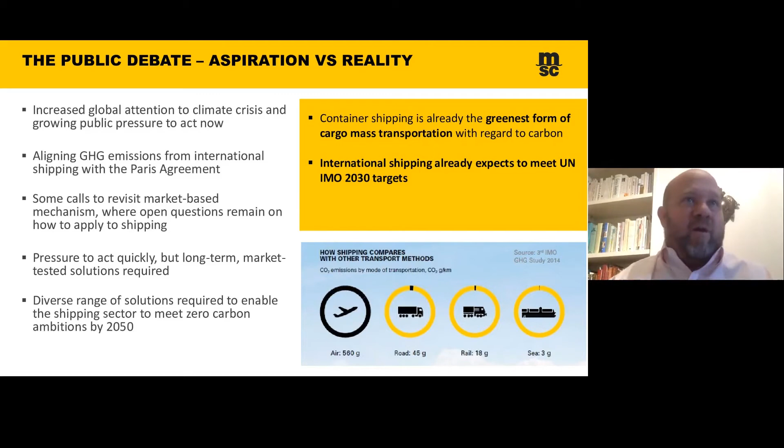We operate ships of different types in different ways, in different services. They have different lives associated with them in their service life. It's going to take a range of solutions. And I would urge everyone, have an open mind. And maybe it's something we haven't even thought of yet. And as ship owners, I think we have to break free of what our traditional notions are of what things have to be and move beyond that.

So I next want to talk briefly about what's going on with technology and innovation. I mentioned more R&D is needed. We've really got to bridge the knowledge and infrastructure gaps there. Shore power charging stations, let's face it, there's very limited availability. It's largely, especially for high power installations, a theoretical conversation, but it can make a difference in port, particularly with local emissions more than CO2.

One thing I'll point out is there are some nations that are really ambitious about installing shore power, but the source of the shore power is not a very CO2 friendly source. So what have you really gained? A gram of CO2 that's emitted in Durban might as well have been emitted in Reykjavik. It has the same effect on the atmosphere. So I think we have to keep that in mind and be practical.

And then batteries, hydrogen, renewable energy, that all plays a potential role. And then I think you also have to look at both retrofitting and design going forward. All the alternatives have limitations. I could do a whole hour, if you'd like, to give my thoughts for what it's worth on these alternative options. But you've really got to think about energy density, both with regard to weight and maybe more importantly with volume, because ships stop making sense at some point if too much of the interior volume is taken up for the fuels. And then you've got safety considerations too.

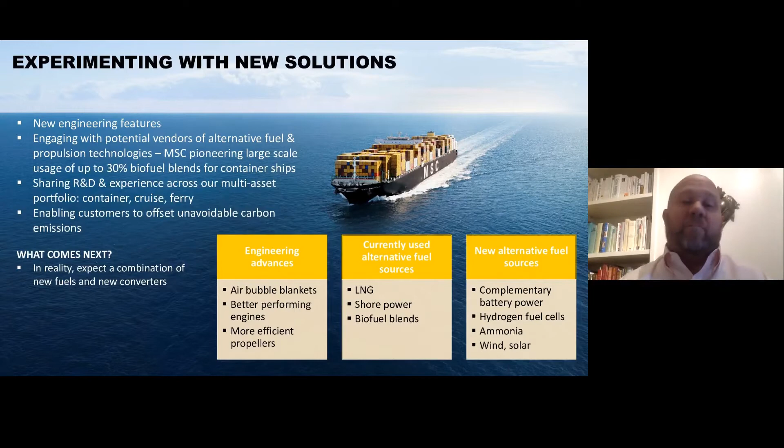And then other things to look at: battery power on large ships. Anytime in the near future, I just see that as being a complementary augmentation type of source, but it still definitely has a role to play, particularly if you've got diesel electric drive, and maybe you can keep that other engine, whether it's a generator or whether it's a main, from starting. You just don't ever have to start it, because you can control the surge with batteries. Has a lot of potential. Fuel cells have potential. I mentioned ammonia, wind, and solar as well in certain applications.

So then the last point that I'll make is just about the container sector. We are an absolutely essential part of trade, but investment in innovation is absolutely needed to bridge the technology gap. And I think both tracks, in regard to fuel and then the primary converters, the engines, if you will, but it doesn't necessarily have to be an engine. We should all be thinking out of the box and really do what's needed to live into the ambition that both we have and also society has for us. Again, I'll reemphasize, there is no one-size-fits-all solution here that I can see, and frankly, I think it is just a mistake to look for one or advocate for just one.

For example, a lot of people tend to criticize LNG. We don't. We see it as valuable today to take the emission gains that are available today, and they are net gains according to the research that I have confidence in, but it doesn't get us to the 2050 needs. But why not take those gains now and then develop biomethane or synthetic LNGs to make that a long-term, broader solution that really works in the end and gets us to the end state.

And right now, we all really need to do a better job as ship owners and our entire community explaining what we're doing. We're doing very good work, and we're actually pushing for regulations. We have repeatedly tried to enhance how we operate and how we're regulated in our space and to do our part. And I think the shipping community has historically just not done a very good job of that, unfortunately. I think we can all do better, and I would urge you all to be part of that.

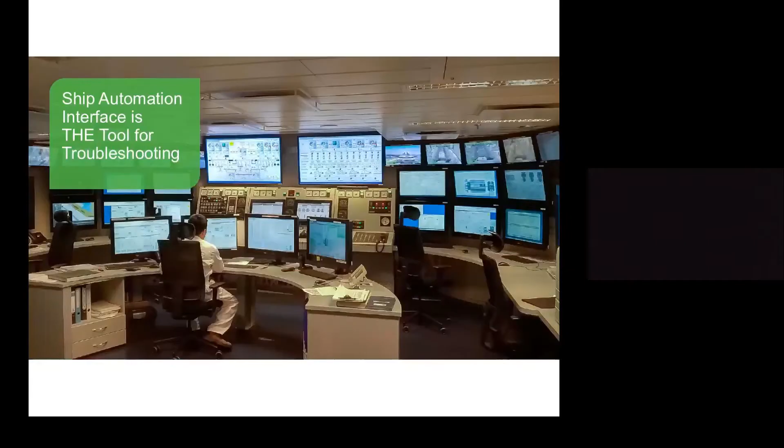The main reason why we are kind of key in helping the ships is obviously the ECR. The ship automation is the main interface for the ship crew for everything that happens on board the ship, and it all comes together in the ECR. All the alarms from various subsystems, all the operations are done from there, and all the historical data is stored in the ECR, and when the ship has a problem, that's where the problems are typically solved, and that's kind of our main center of information.

Large cruise ships have a lot of displays, a lot of information, of course, in the ECR. But this is kind of a typical setup in a modern cruise ship. Why is Valmet talking about this issue?

We've been providing these ship automation systems since the early 80s, 79, 82, and most of the systems on board, the bit older systems, they are all ours. There was a time period when the systems were delivered by our partner at that time, Valmarine. Mostly the cruise customers will know that name.

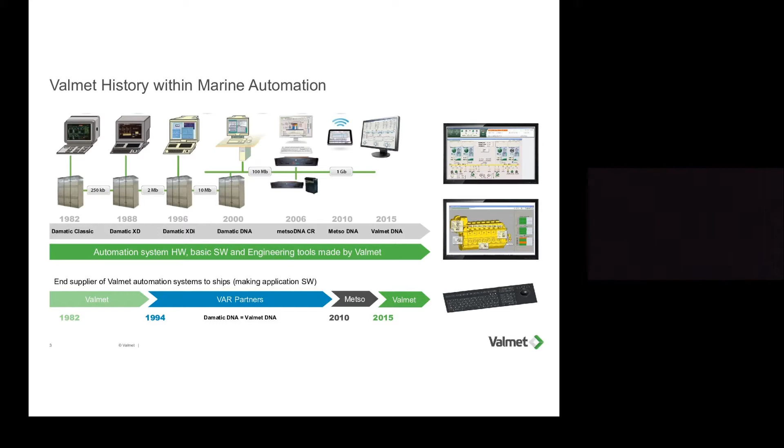About the remote operations and capabilities, we have 8 global service centers that are working completely remotely together with our customers in 4 continents. So basically meaning we have a manned service center in all time regions, and hundreds of connections to our customers' systems and hundreds of service cases throughout those remote connections. That's kind of the background why we are talking about remote connection. Especially it's been utmost useful during these corona times.

In North America, where I am, we've been able to support not only our cruise fleet, but also the so important tissue machine industry making toilet paper throughout our remote connections, while basically all the customers have banned entry of service personnel into the sites.

Also, we've been able now to do full system startups so that there is a minimized team on the site, and expertise support is done by remote connections. These all to limit the traveling needs to the sites and the amount of people possibly having connection with any other people.

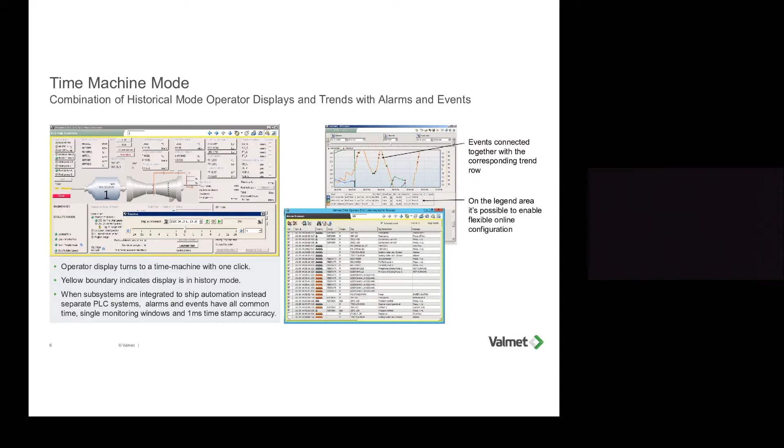Well, it's all great when the internet connection is in place and we can get the remote connection, but unfortunately that's not always the case. Often in the cruise industry, connections are poor and non-functional. So we need to have alternative plans and plan Bs in place. So this replay function that I showed previously becomes extremely valuable when you need to go to plan B.

So what the team can do is they can actually pick up their phone, do the replay function on the screen, video it, and then send it by phone connection. This is something that we have been using in several cases where the actual remote connection to the ship has not been working for one reason or another. And that allows the ship personnel to deliver the vital information to their superintendents and to us.

It's also at these times very difficult for superintendents to go on board the ship as well. So it's vital that the ship can somehow deliver the information to the shore, as the ships keep on having problems even if they are not sailing.

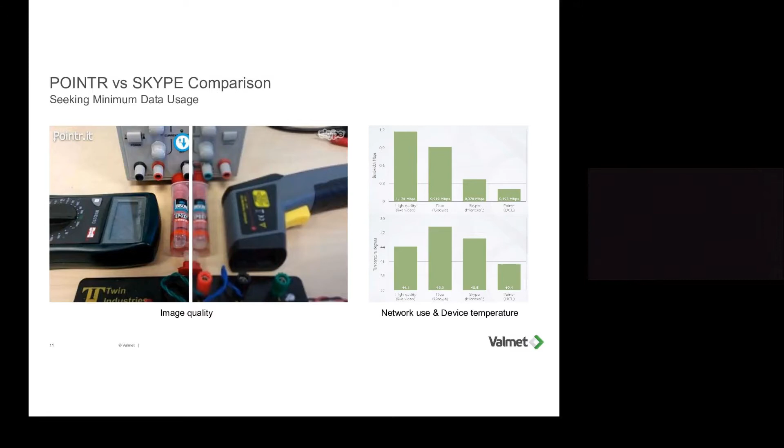When we are talking about remote access and remote support, we also, of course, need to think about the security, and this is something we can't avoid. A few tips there. Of course, nowadays all the companies are well educated on cybersecurity items, but I want to pinpoint that, first of all, there are very good guidelines: in the US the NERC CIP guideline for power plants and public utilities, and DNV GL and Lloyd's have their guidelines. We've been following all of those for years.

Also, when DNV started testing of the ships, we were the first ones on board doing the testing, testing our systems against their guidelines and making them stronger in case we needed to do adjustments.

And then a painful and difficult thing in the current economic conditions for cruise companies is that the Windows systems should be really updated. Windows 10 is the recommended system as well. The patching should keep on being done. With a lot of the systems, there is easily a temptation to hold off on the patching in the current conditions.

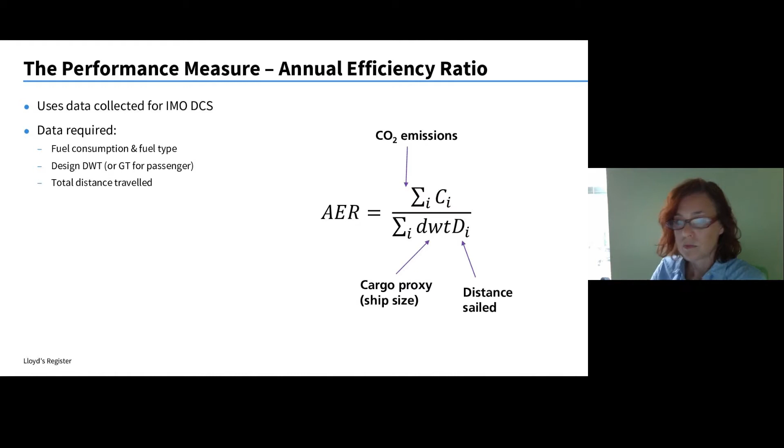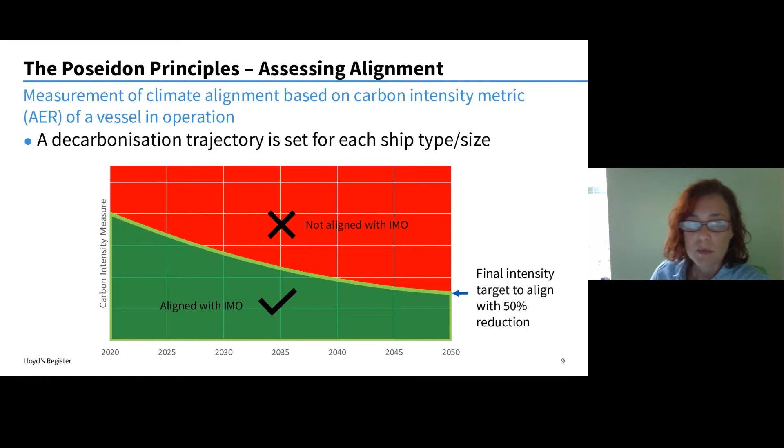And graphically, when it's calculated, it's reviewed and shows up in green. If it's not aligned and the calculation is above that trajectory, it shows in red, for ease of recognizing what ships in your portfolio are not aligned. This makes things relatively simple.

The vessel carbon intensity can be calculated using data provided by the ship owner as collected by the IMO DCS. This data has been independently checked to ensure compliance in accordance with these regulations, but requires the ship owner to provide consent for the data to be submitted to the relevant flag state and be shared with the signatory. The Poseidon Principles require that all signatories use this method for calculating carbon intensity so that it is, again, consistent.

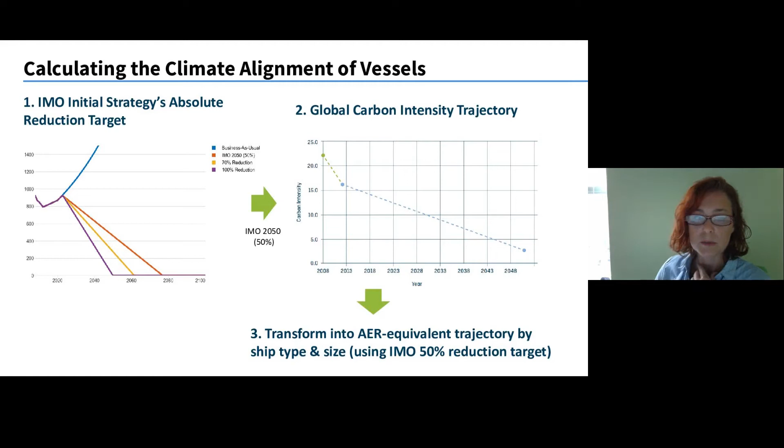To assess climate alignment for a single vessel, the vessel's annual carbon intensity is compared with the decarbonization trajectory for its respective ship type and ship class. And early on, you can see that it is much easier to use energy efficiencies as a method to drop your trajectory. And this is how the ships are represented, or the company sees the overall climate alignment of its shipping portfolio.

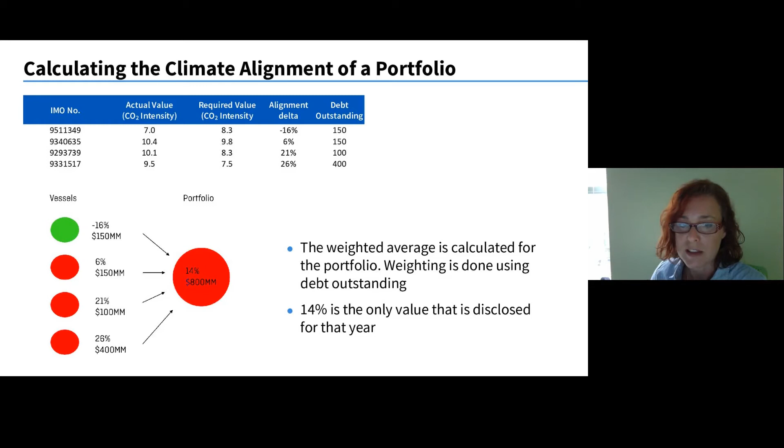So how do we meet the transparency requirements? On an annual basis, each signatory reports the overall climate alignment of its shipping portfolio and provides supporting information as per the accountability requirements to the Secretariat. This requirement takes effect for each signatory in the calendar year after the calendar year in which that member became a signatory, no later than November 30th.

This is done on an annual basis, and it is published for the overall climate alignment of its shipping portfolio, and also in any relevant institutional reports on the timeline that is appropriate for that signatory.

The accountability and enforcement principles are intended to ensure that the assessment and disclosure of portfolio climate alignment under the Poseidon Principles is practical, fair, and accurate. The intent of this approach is to ensure the development of trust in the Poseidon Principles amongst the signatories.

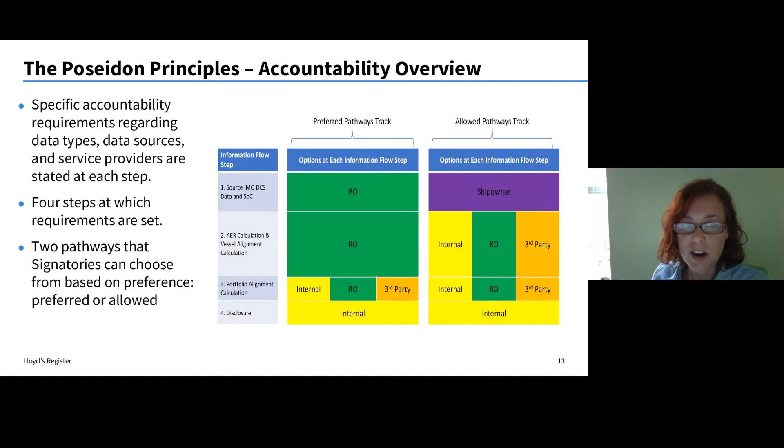At each step of the assessment of climate alignment, signatories rely exclusively on the data types, data sources, and service providers identified in the technical guidance. All these details are outlined in the guidance documents that can be found online.

So, the Poseidon Principles allow you to balance and manage risk in your portfolio. It's a potential instrument in carbon trading and offers significant benefits to signatories, to the global maritime industry, and to society as a whole.

What kind of climate alignment services are available? Using AIS, IHS Fleet Database, and LR ship performance models, we can determine the climate alignment, and this method has been proven to be plus or minus 5% accurate.

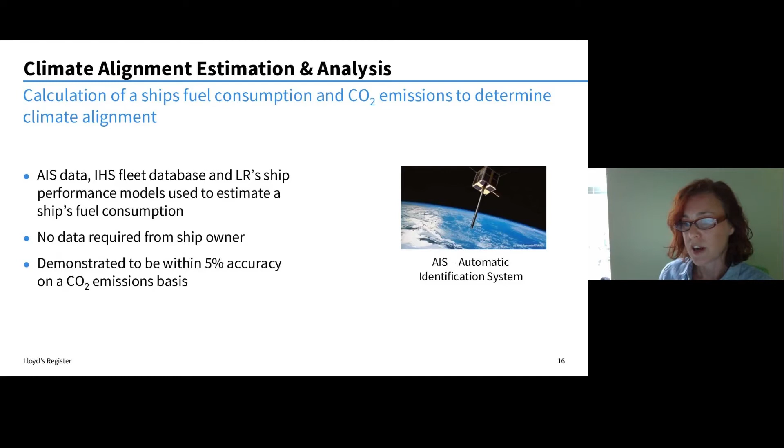By comparing more data, you of course increase accuracy, and the starting point is IMO DCS data that can be provided transparently for vessels that are classed with your RO, or that can be provided directly in the form of regulatory documents and certificates on board.

This is an example of climate alignment estimation and analysis, and it reports the annual efficiency ratio. And it shows what would happen if no further action was taken in the future, using the Poseidon Principles, all 4 principles.

So what kind of things need to be considered before becoming a member of the Poseidon Principles? Careful feasibility studies, risk reviews, and modeling are recommended to analyze voyage routes, operating ranges, missions, and ensuring that there's a consistent, reliable supply chain, that the infrastructure has been developed, since there are varying levels of confidence in some of the low to no carbon technologies.

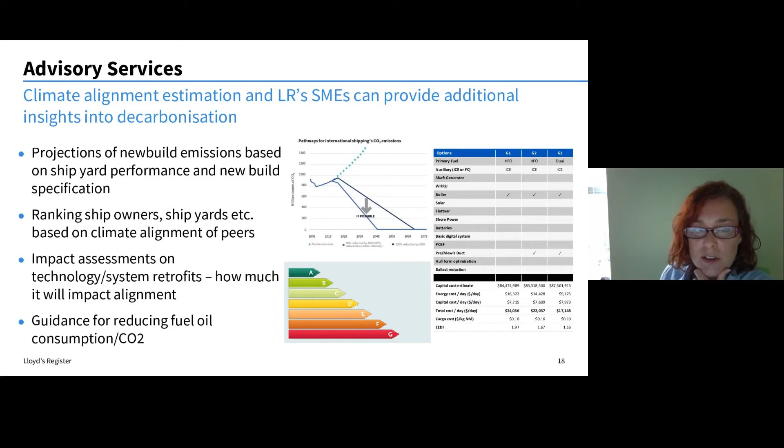And collectively, collaborations are of benefit because the infrastructure can be partnered with government agencies and also with ports that are interested in being part of this transition. There are many that are already investing in renewable energies. And so it's really important to understand where those actions are taking place, and what portion of your fleet might benefit from that.

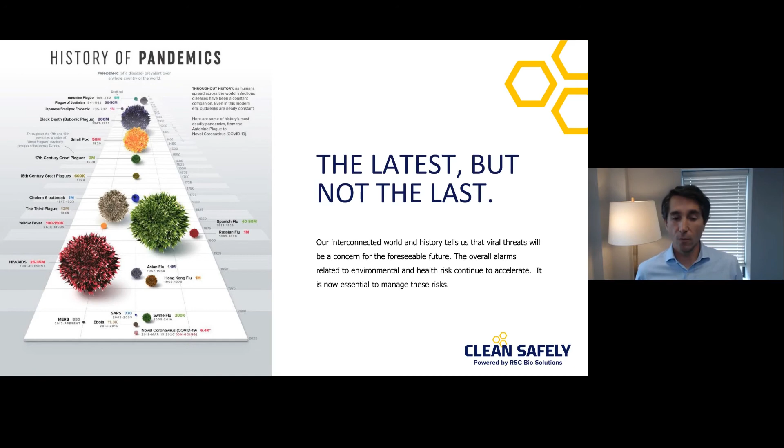If you study this chart closely, you'll see that pandemics initially were coming every few hundred years, and then you would see one every 100 years. Then there was one every 50 years. In the last 20 years, there have been 5 pandemics. So in the marine timeline, a vessel on a 5-year dry docking cycle should expect to deal with a pandemic within that cycle, which is really hard to imagine when you consider the issues that we're all facing trying to deal with the current crisis.

And like many of these threats, whether it be the environmental risk that we talked about earlier or this pandemic threat, it's our responsibility as leaders in the industry to address the concerns about health and safety. And true to our strategy, we want to do that in a way that doesn't compromise the business, the economic goals of the company, and the challenges the industry is facing to create value. We want to balance both, and that's why we are excited to be talking about some new solutions today that we think will do that.

We have been, as I said, in this space for a long time, really built around this initial lubricant technology, and we saw the opportunity to take our experience in both cleaners and lubricants and essentially create a platform. We had been hearing a lot of questions and challenges about how do they do this? How do they make the environment, whether it be the office environment or the vessel environment, safe? And so we feel like this is an opportunity for us to create some value.

And it's not just a reaction to the current times. We believe this is going to be a significant and important platform for us in years to come. And a lot of it is based on the same thing that we have been doing with customers for many years, which is helping deal with the confusion and the uncertainty around how do I keep my business running, address this risk, but do it safely, do it efficiently.

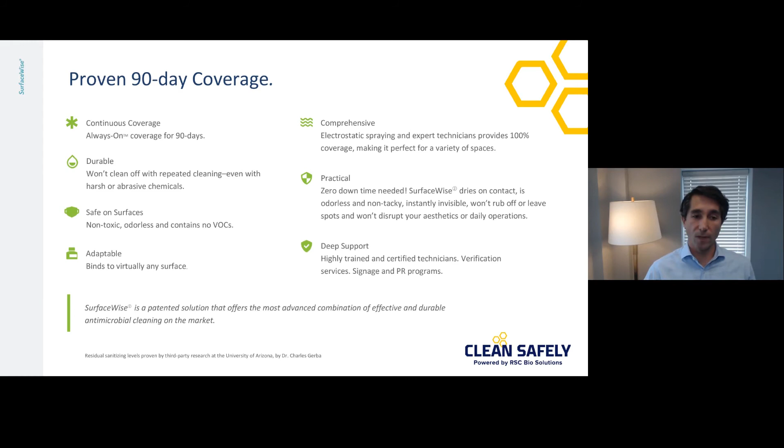We have a significant amount of research behind this on 2 generations of this technology. The initial technology that has a long track record has a lot of data in hospitals, in transit authorities, in a variety of applications that show durability. And what's important is the evolution of the technology has improved the binder so that it is not only more durable, but now the effectiveness against the coronavirus is now evident.

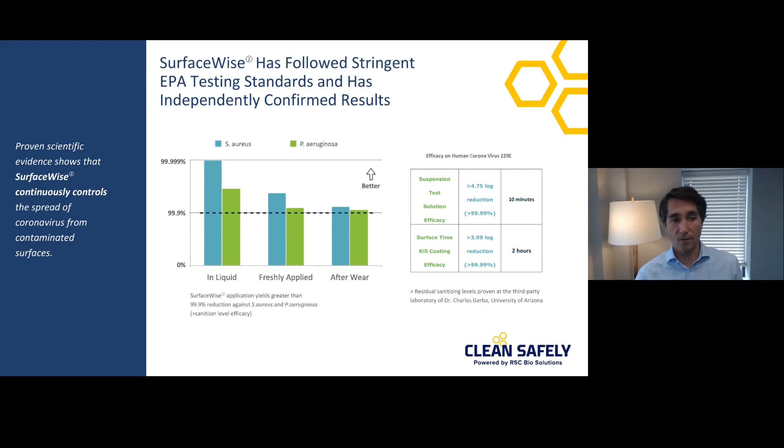And there are a number of research studies, again, to support this, including research behind the coronavirus itself. And I think what is really important to understand when you think about a technology that can deliver essentially an always-on protection is it does two very significant things for the vessel owner operator. The first is it can dramatically change what the practices around daily disinfecting could look like.

So in many cases, our customers are doing nightly disinfecting, daily disinfecting, which provides a point-in-time solution, but then as soon as contaminants enter the environment, there is no solution until the next daily disinfecting. Our view is some of that disinfecting is going to continue to happen with this technology, but the amount needed to maintain a healthy environment is dramatically different.

The second thing is the overall bioburden, that the amount of biofilm that accumulates on surfaces is dramatically reduced. And this is what most of the studies that have been conducted are designed to do, is to look at the accumulation of the bioburden and the level of reduction that takes place with this type of coating.

So imagine in an environment like a cruise ship, if you're able to reduce surface contaminants by more than 75%, and the potential for infections and cross-contamination significantly, what that does for a vessel owner operator, a cruise ship, could be really significant in terms of risk reduction, regardless of the savings on the daily disinfectant side.

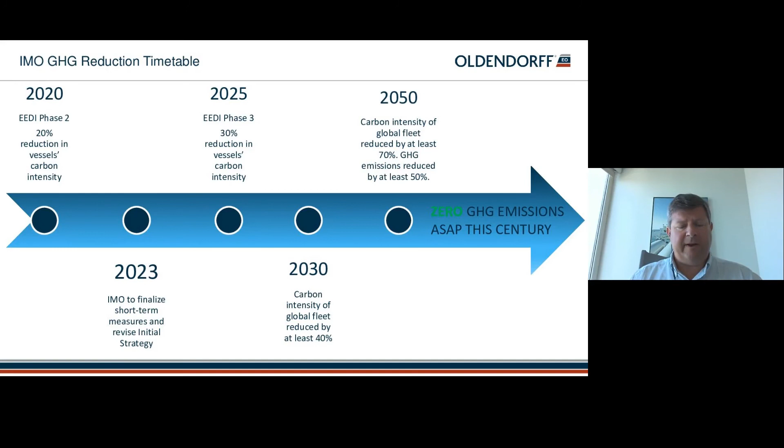I don't think we need to spend much time on this slide. Most of the audience is probably familiar with the objectives set by the IMO 2030, 2050. Just to comment that most of what's being talked about today is carbon intensity. However, by 2050, all greenhouse gases are expected to be reduced by 50%.

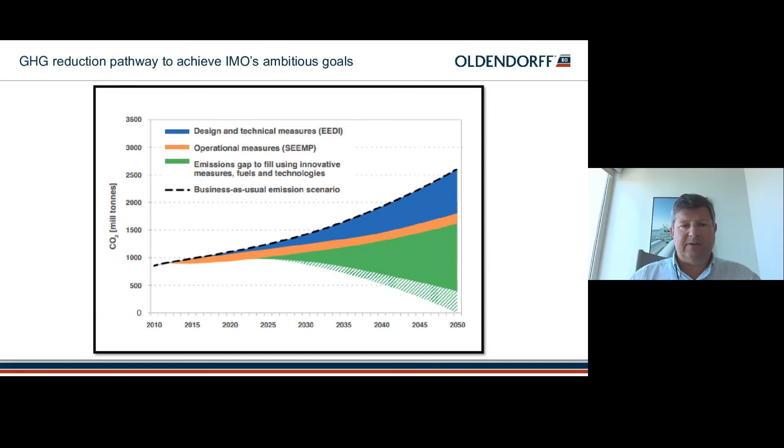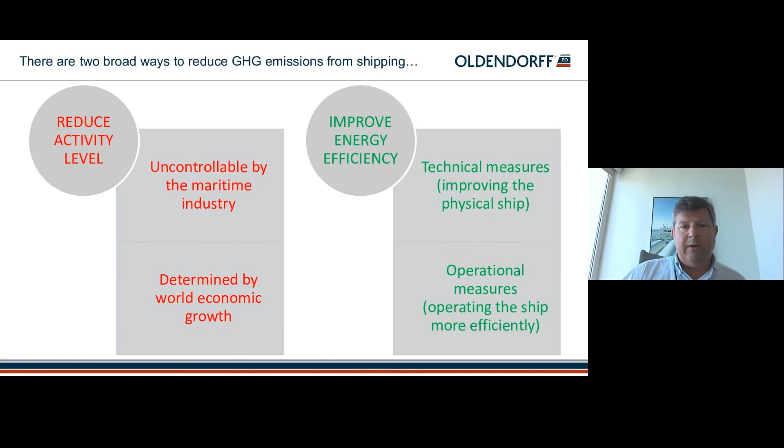Generally speaking, aside from or excluding alternative fuels, there's two ways to improve or reduce the GHG emissions. One is to reduce the activity level. However, as ship owners and maritime industry generally, we're unable to do that. We can't control those factors that affect global trade. However, what we can do is focus on improving efficiency.

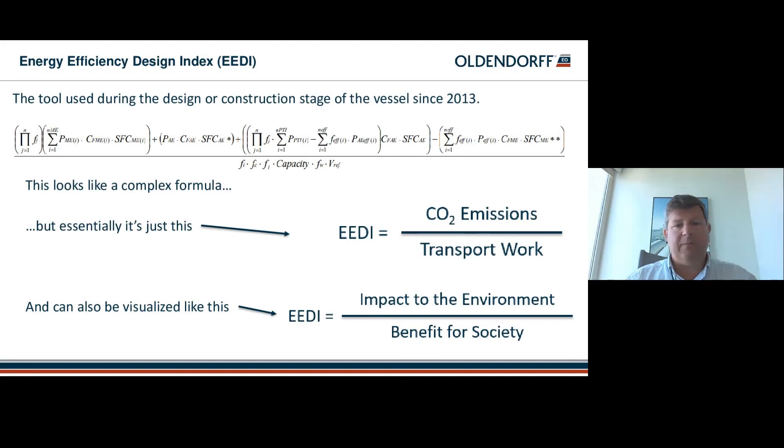One of the things that I think the industry hasn't gotten much credit for by the environmentalists is the work that's been put into the EEDI. It has progressive phases. It started before we were actually measuring emissions. And it is making some improvements that we're already seeing today. The progressive phases continue to apply, and the next phase 3 comes into effect in 2025, just 5 years from now. So ships still built in 2025 will have to meet more aggressive standards than ships built today.

The rest of the elements that can be controlled by ship owners to some extent are operational indicators. These indicators are based on the actual operation of the vessel compared to the design of the ship. There are two main concepts right now that are driven by regulation. One comes from the IMO in their data collection system. And from that data that's required to be reported as of last year comes the average efficiency ratio, AER, which was mentioned earlier today by Ginger.

The EU also has a regulation known as MRV, and they enable a calculation of the Energy Efficiency Operational Index, or EEOI. However, the EU regulation only applies to vessels and voyages coming to or from the EU, so it's not giving a true global outlook. The main difference between these two is the denominator of the ratio, where the IMO system uses the vessel's full deadweight as the denominator in the ratio. The EU does a somewhat better job trying to capture utilization and uses the actual weight of the cargo transported.

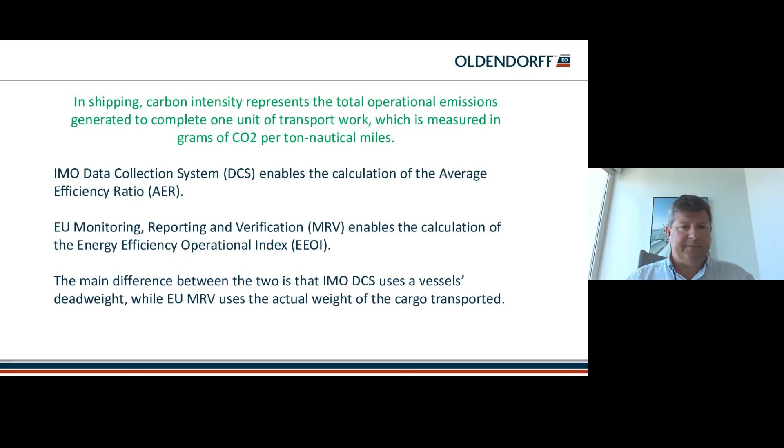The problem with the EU system in reporting the actual weight of cargo transported is it can be somewhat commercially sensitive, and that has gotten some pushback from the industry.

Here is a bit of a cheat sheet. My presentation is available to the audience, and it's not intended to understand or get into all these formulas, but it's a clean cheat sheet, as I say, to help remind everyone what some of these indicators are and what they mean. And what I suggest is focusing in this area that just gives you a brief description of what each formula means, because with all this alphabet soup floating around, it's easy to forget which one is which and how they differ.

But just to repeat what I've said, the first one, which is EEOI, uses actual transport work. The basis is how much cargo is actually carried, as opposed to AER, which is the IMO one, which is based on the vessel's deadweight. There are other ratios available, or they're being used.

The next one down here is the individual ship performance indicator. And this is the amount of CO2 emitted by the ship using the distance traveled as the proxy for transport work. And finally, there's an energy efficiency per service hour, something that's being promoted by the United States at the IMO, and it's based on service hours in the denominator. So CO2 emissions based on service hours of the ship.

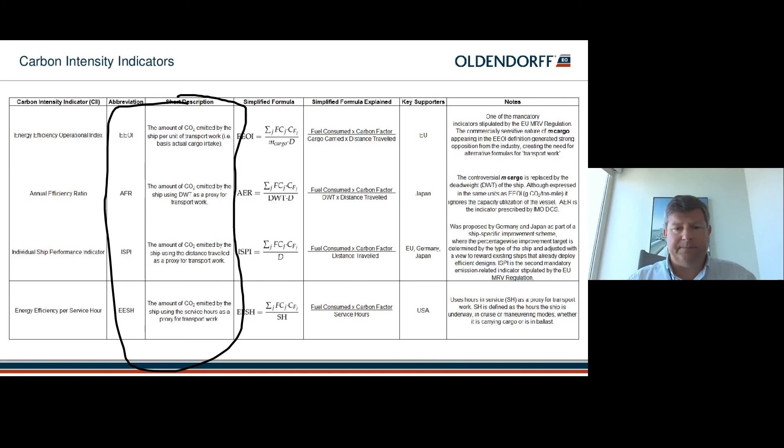Commercially speaking, there's a variety of incentives that are available to the industry. The first one is the Environmental Ship Index. This is an initiative of the IAPH's World Ports Sustainability Program. And what it's attempting to do is incentivize ship owners to reduce their emissions in exchange for port cost reductions. Oldendorff is participating in this program.

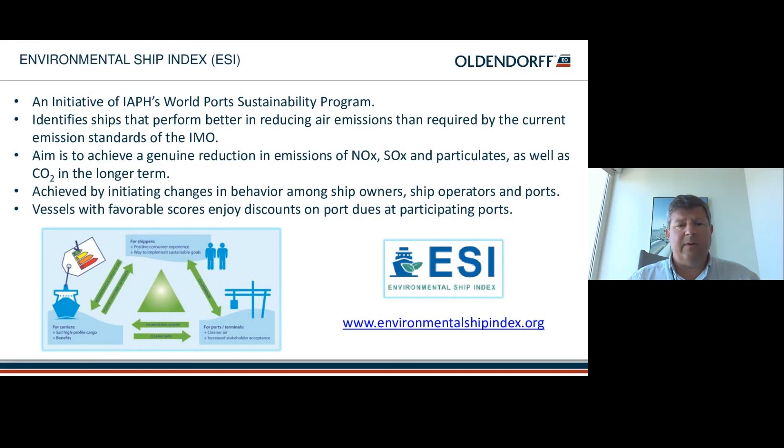We're reporting to them every 6 months as required, and we're obtaining tens of thousands of dollars of port fee reductions around the world based on the participating ports. As I mentioned before, what's interesting about this system is that it looks at more than just carbon intensity. They're looking at the NOx, SOx, and it's continuing to evolve, and it's more holistic about the vessel emission program.

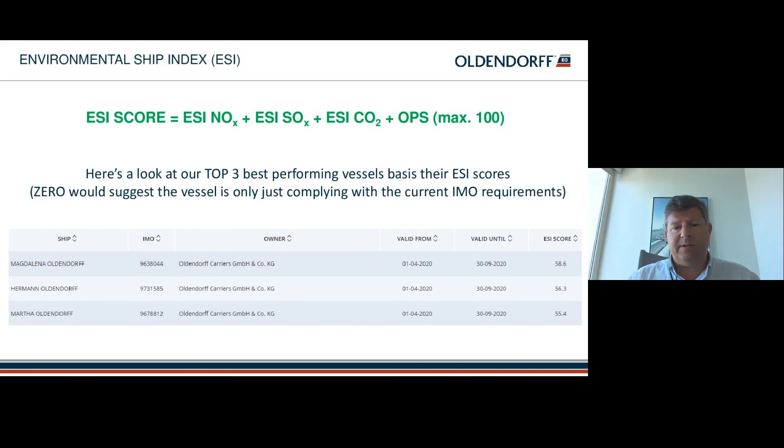The formula is a bit complex and needs more detail than the time we have, but their website is quite helpful, explains this, and it lists all of the ships participating in the program. Below is a screenshot of some of our vessels that are in the program. And what to notice is that the higher the ESI score, the better performing the vessel is and the greater port discount you may receive.

Ginger spoke about the Poseidon Principles. This is an initiative of the Global Maritime Forum. The financial institutions are starting to use this, and I can say that our lenders have started to request us to report our emission data, which has already been reported to the IMO. The key to understand about Poseidon Principles is they're using AER, the annual efficiency ratio, one of the several ratios that I've mentioned before.

I thought it would be useful for the audience to start to understand how these ratios are presented and what some actual numbers look like. So with our fleet, I've pulled a few ships of different sizes, and just again to try to demonstrate how the different ratios that are being discussed look and how they compare based on different size vessels.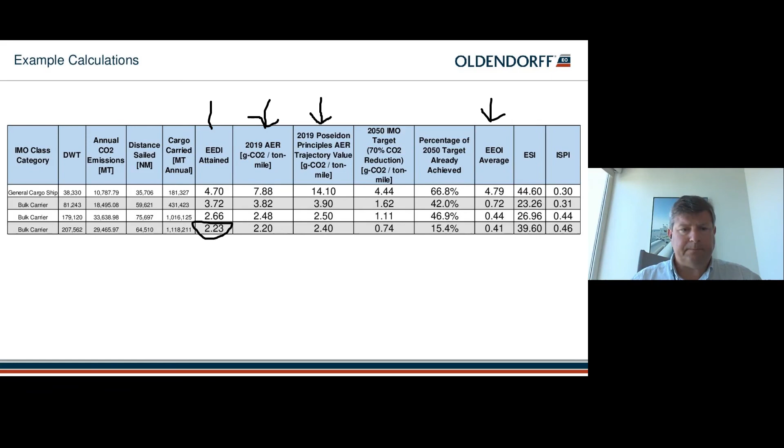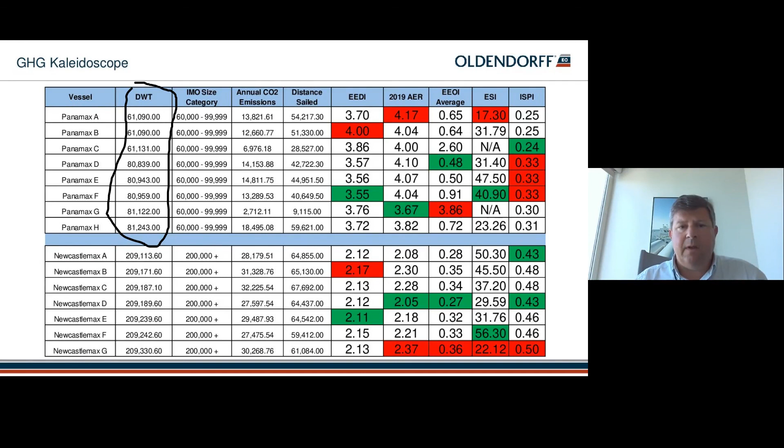And what you can see here, the Panamax B, as I call it, our worst performing vessel from an EEDI standpoint, is actually middle of the pack for the other ratios. Similarly, Panamax F, which is our best EEDI of this group of vessels, is one of the worst in terms of the individual ship performance indicator. So you can see that none of these formulas are actually perfect or consistent. And one of the issues that has to be addressed is how vessels are grouped and compared with their peers.

Now, we have a fleet of Newcastlemax ships that all have approximately the same deadweight. But what you'll be able to see is they vary based on the trade of how much emissions, which is a result of how much fuel they burn, and how far they sail. There's a little bit more consistency here because of the same denominator of the deadweight.

And what you can see with Newcastlemax D, they're pretty consistently performing against the AER, EEOI, and ISPI, whereas the worst performing EEDI, again, is middle of the pack. But one of the middle of the pack EEDI vessels, Newcastlemax G, actually is the worst performer with regard to all the other ratios. So I thought this would be interesting for the audience to see.

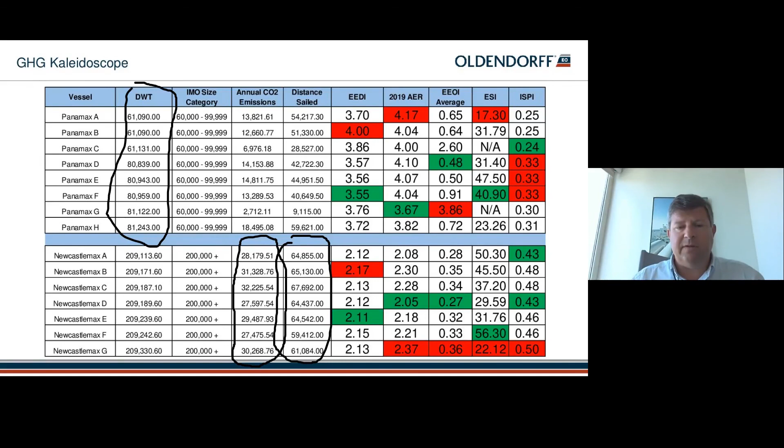Now that we have this data, it's the first year that's been available because it's been required to be reported to the IMO. And I think the industry is just now starting to understand how these different formulas come together and how they might be used in the future, both commercially and also to achieve some of the emission reduction intentions.

So to conclude this, I say that the GHG measurement and ratios, they're here to stay. None of these ratios are perfect. Some miss the details that may result in unintended behavior. For example, there's no segregation of ships with cargo gear versus just open hatch vessels. And this is of particular significance in the dry bulk trades, but also certain container ships that have cargo gear that may not be used, but will affect the fuel consumption.

So often we see geared ships going to developing countries, and could an unintended behavior be that ship owners avoid trade with those countries because it's going to ruin or increase their emission record? So it's just a question I put out there.

We're only starting to see these calculation results because the regulations to report them have just come upon us in 2019. So we're starting to see the actual data feed into the ratios that have been somewhat theoretical up until this point. I think we can expect, and we're already seeing, that the ratios will be politicized, especially by the environmental activists that are keeping us on our toes. We can expect they will continue to move the goal line and try to drive continued improvement, even beyond the regulations that are being discussed today.